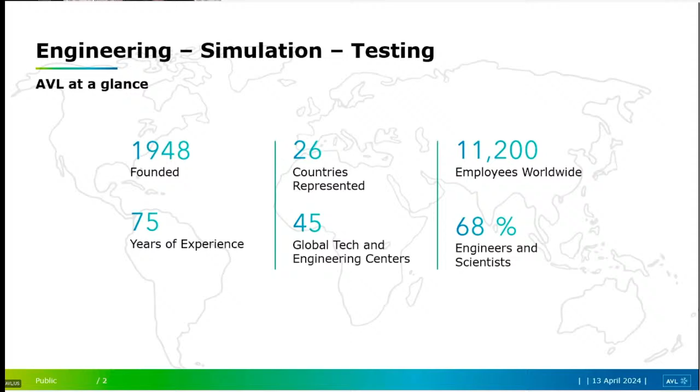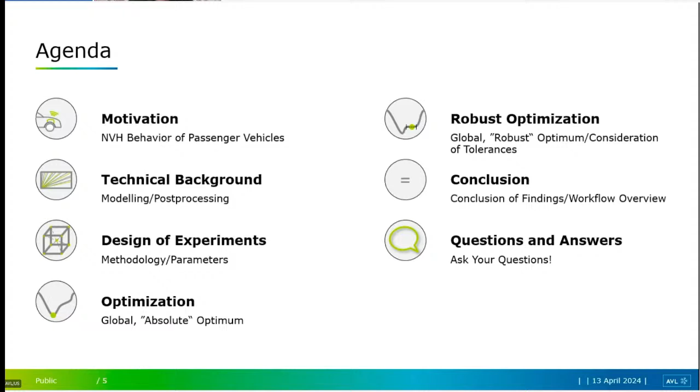With conventional ICEs, the engine is really masking a lot of noise from the gearbox. With EVs, the e-motor is actually very quiet, and nothing hides really annoying noises from the gearboxes anymore. So this gets annoying, and we want to prevent it. And also it's a cost topic.

In order to produce cheaper gearboxes that are still acceptable to the ear when you are driving at low speeds, the optimization of the gearbox is of much more importance than it used to be.

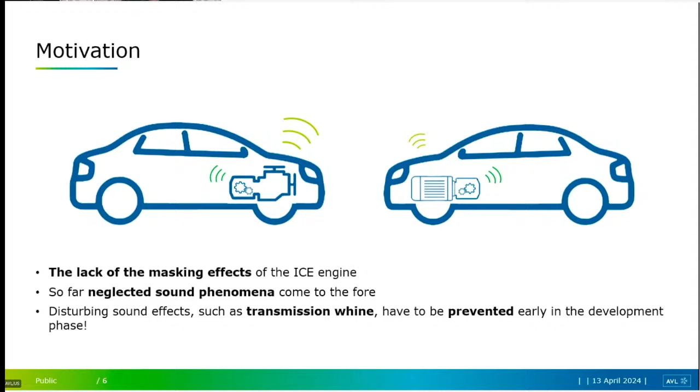If we move on, the gearbox that we will be looking at today, we have a screenshot here. In the middle, we see the e-motor that is connected to a planetary transmission, and then it goes in two gear stages all the way down to the differential, which brings the power to the wheels. And we see a section cut down here on the right side.

You see the bearings, the meshes, and the tapered roller bearings on the differential. Actually, these screenshots or images that you see here are from our tool AVL Excite, which is a multi-body simulation tool. Basically all the elements you see here are modeled in one 3D model, and it lets us simulate the interactions of the vibration of the entire part.

Now, the focus of the optimization today is specifically this second spur gear stage. We will see in more detail on the technical background on the next slide.

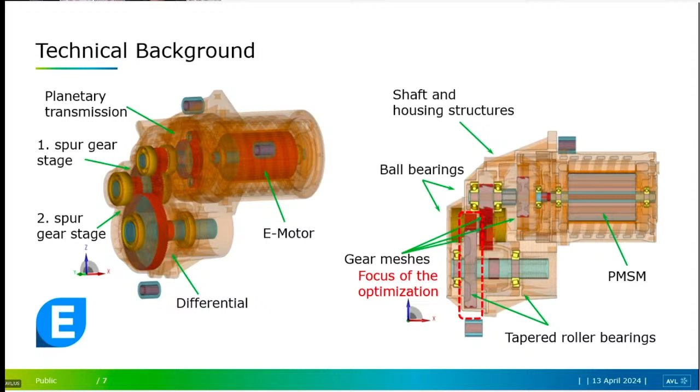So where does the noise really come from, or how is it introduced? When we look at this gear, it's the point of contact - basically by rotating and with the teeth, it introduces stiffness across the rotation. So this rolling contact of the flanks and the change of stiffness is introducing vibrations into the system.

These vibrations excite and transfer through the bearings and the shafts onto the case, to the surface of the case. We can follow this on the transfer path into the housing.

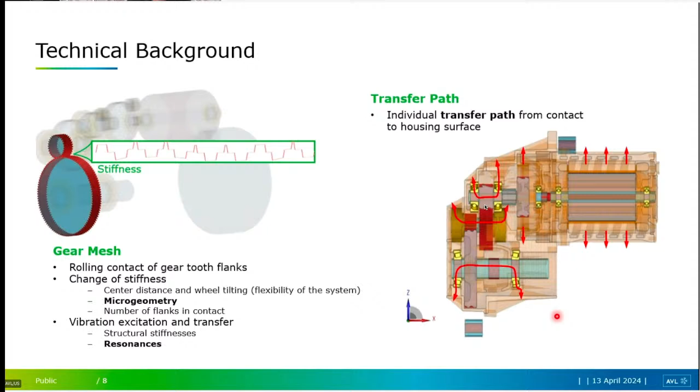Actually a nice technology in Excite lets you analyze this transfer path. So when we look here on the gear, we see the transfer path analysis, and specifically we can pick a point and see the connected elements and identify which connected parts contribute most to the actual vibrations.

By that, we can identify really what part is causing the majority chunk of the vibration. In this case, it was identified as the second spur gear stage, and we will look at specifically this one today.

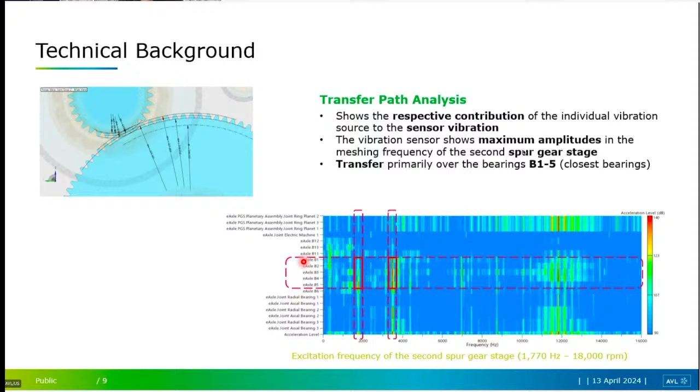It's worth mentioning that AVL Excite works on the time domain, so we can run fully transient ramp up over the entire RPM range over time.

What we can do then is draw a Campbell diagram on the full scale of the point. So on the right side we see the case, and we pick actually a sensor point on top of the housing.

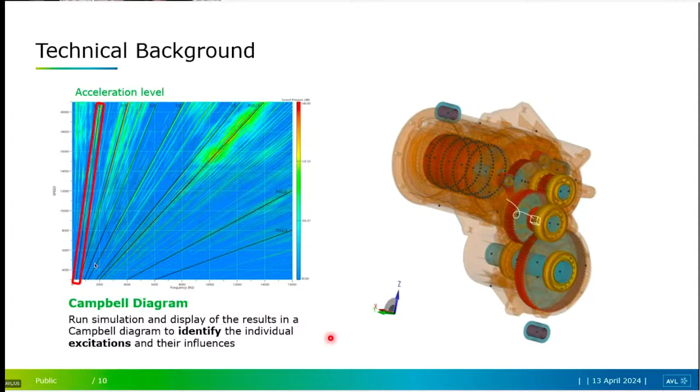Looking at this point, we can identify which one is the causing part or has most promising part for optimization. And this is what we look on the next slide.

Oh, yeah, so okay, I hand it over to you. With this one, basically, we need to know what we want to optimize and what we can optimize, and this is exactly where your specialty is coming into play.

Yeah, for sure. Thanks for the overview on gearbox design and engineering. So for optimization, you'll always need some parameters that you're varying and then some KPIs that you're looking at.

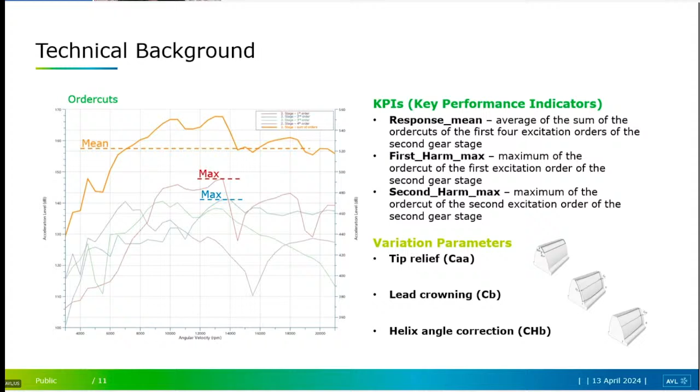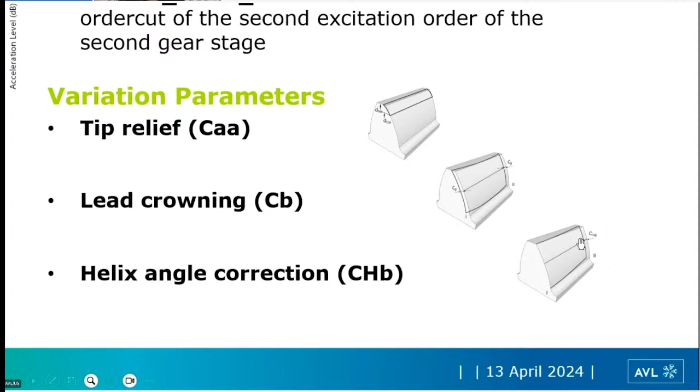And the things we're varying are the tip relief within the gear, the lead crowning in the gear, and the helix angle correction in the gear. These are drawings that show how that looks relative to the gear design. So we're doing the tip here, the lead crowning, which is this more width-based parameter, and then the helix angle correction, which is sort of a twist-based parameter here.

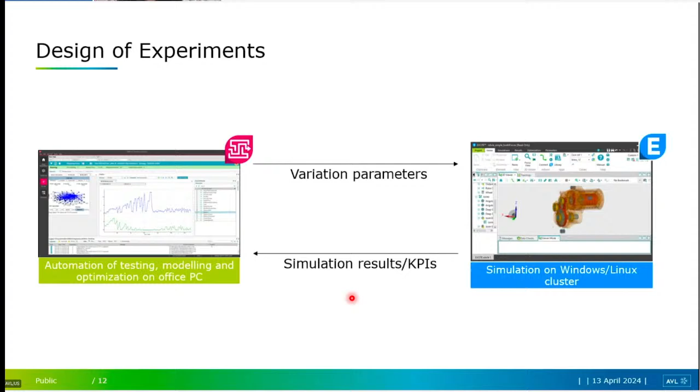This whole workflow can be run on Windows or Linux clusters because, as you all know, optimization is quite computationally intense, so that shouldn't be too much of an issue. Just for the calculation's sake, each simulation point we do takes about 10 to 15 minutes or so, and I'll explain why that's important later in this presentation.

So we're attempting to build out a design of experiments, which is the first step of any optimization workflow. These are the boundaries, the min and max, the range of variation of these inputs. Tip relief is 0 to 15 micrometers, same thing with the lead crowning. The helix angle is negative 15 to 15 micrometers relative to a certain point on the gear. And we also had to vary the speed from 3 to 21,000 RPM because we wanted to understand the sound output over the speed range.

Like I said earlier, our KPIs are the first and second harmonic of the gear meshing frequency — the maximum of that, and then the next one will be the sum. So it's basically 3 outputs and 4 inputs that we're varying.

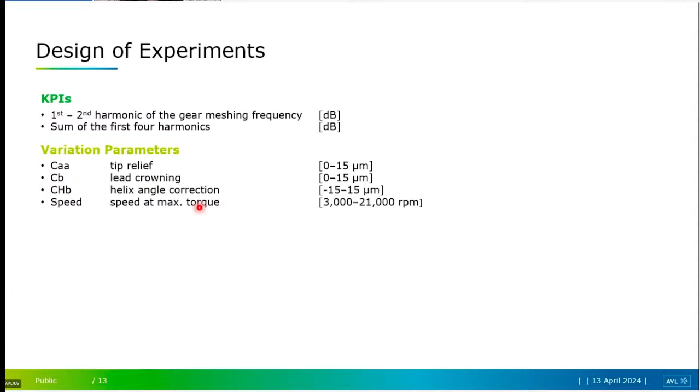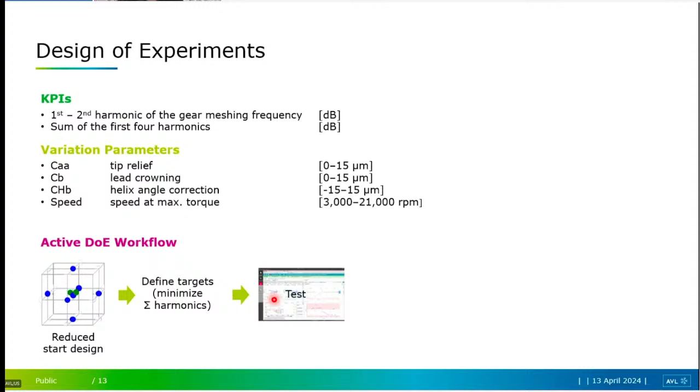In here, you see the workflow of the active DOE. We start with a reduced design just to understand the initial design space. We've defined that we're attempting to minimize these KPIs. During this simulation, or test as we'd call it, the results are sent to this active DOE, and what it's doing is developing a response surface off of these inputs that's guided by our target. It keeps telling it, hey, maybe you should fill more points here, maybe more there. So it's effectively a space filling algorithm with a bit of enhancement on AVL's own IP.

Then you'll look at your results and see if there's enough. There's an offline optimization that will occur here using sort of a hybrid of genetic algorithm and gradient-based methods.

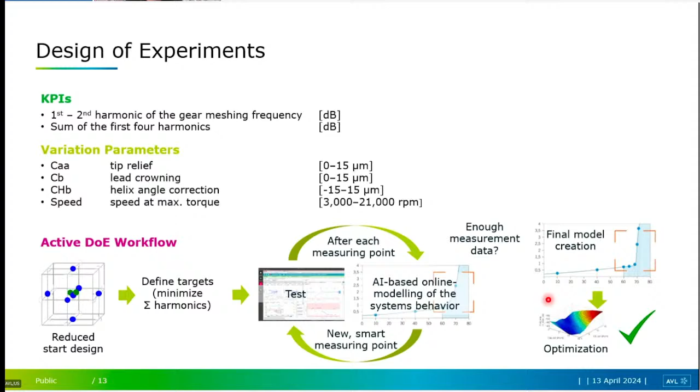When we go into the DOE, you can see here that we filled the space quite well. It's not a full factorial — as you can see, there are some gaps here. The reason is because a full factorial would take over 50,000 designs to be fully filled, and you can imagine at 10 to 15 minutes each, those 50,000 designs could take months to compute, depending on your computational resources. We did only 900 here, so you're only really looking at 900 points.

And those 900 points took us probably about the weekend to do — went from Friday roughly to Monday. That's the real power of having an intelligent space filling algorithm like the active DOE.

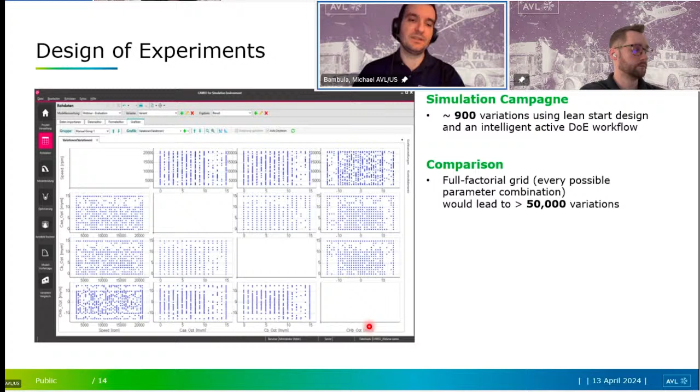In the design of experiments, after we've done all of that, what we're attempting to do is create a meta model or regression model of our DOE values. So we used a neural network to represent the simulations that we had, and attempted to make an accurate representation of our different KPIs.

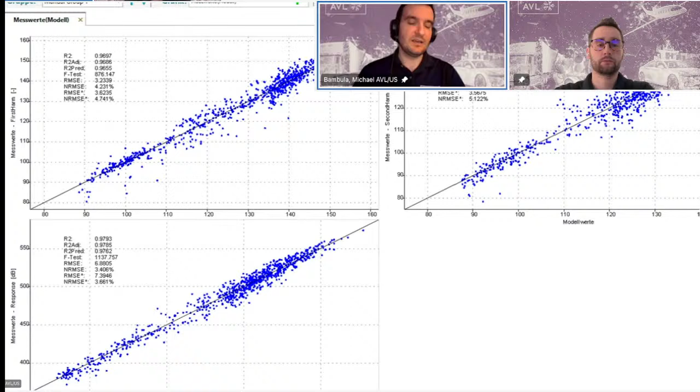You can see here we have the first harmonic on the top left plot, and on the top right we have the second harmonic, and on the bottom we have the sum of all the harmonics. What you can see is there's a relatively good correlation. We have different metrics, R squared, RMSE, and they're all relatively good. You're above 95-95 for all the R squared, so it reflects a relatively accurate surface of the DOE that we were doing.

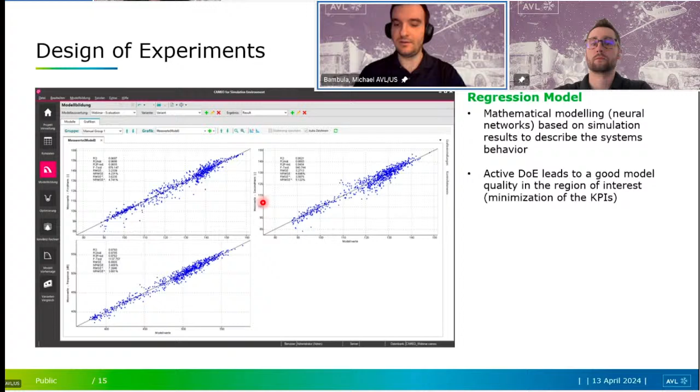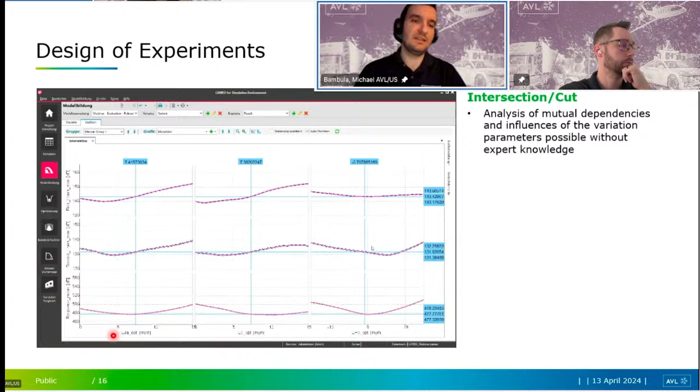And then the thing that we're doing here is we took a slice of that surface. This is what we call an intersection or cut of that surface. What we're doing is we're varying individually the inputs to understand the outputs.

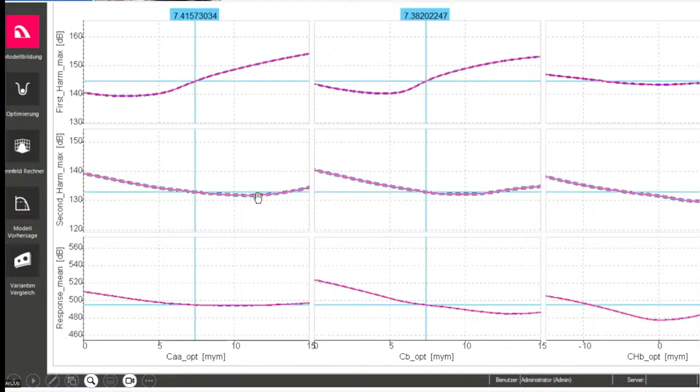So you see here we're varying the inputs, the CAA opt, CB opt, and CHB opt. These were those three inputs of the gear tooth that I was talking about. We're varying those individually to understand how the surface moves, because when you vary one, you move in 2 dimensions across the other surface. So you see when one of these lines moves in the horizontal, the other 2 red lines are moving up and down. This is just for you to explore and understand how that variation looks when you're doing this exploration.

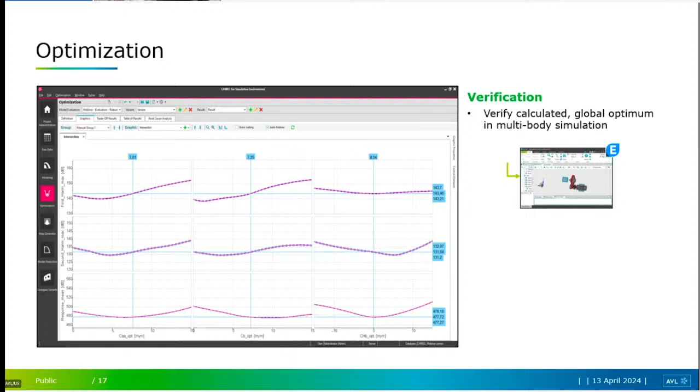But we used an optimization algorithm to effectively arrive at an optimum. And what we did after that, because it's a meta model output, you want to ensure that what you've arrived at using the meta model or the neural net that we were training on the surface, you want to actually validate that with a simulation or a real test to ensure that's exactly your real value. So this is where you see here on this picture, we verify it in Excite to ensure that's real.

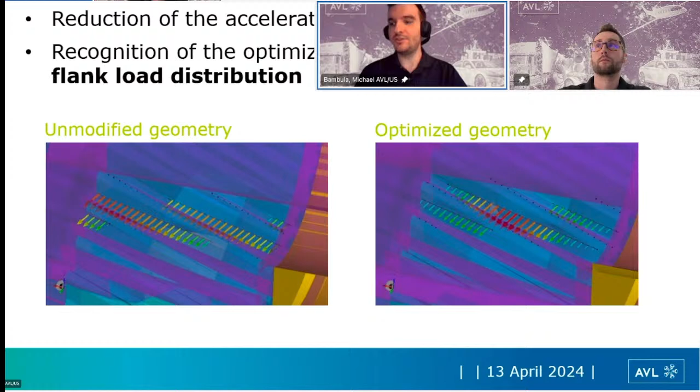However, there's a couple of questions we want to ask here, and we'll get to that in a bit. But this is how the geometry looks when you're looking at the unmodified geometry and the optimized geometry. You see your stress at the teeth is not very well distributed, whereas in the optimized geometry, you have it very well distributed. So you basically have a more durable gear set as well as a gear set that's quieter.

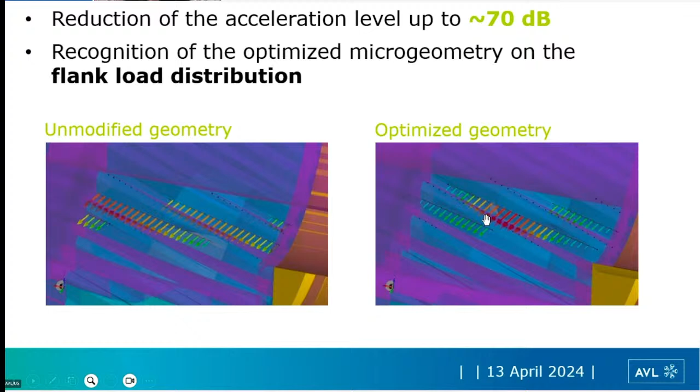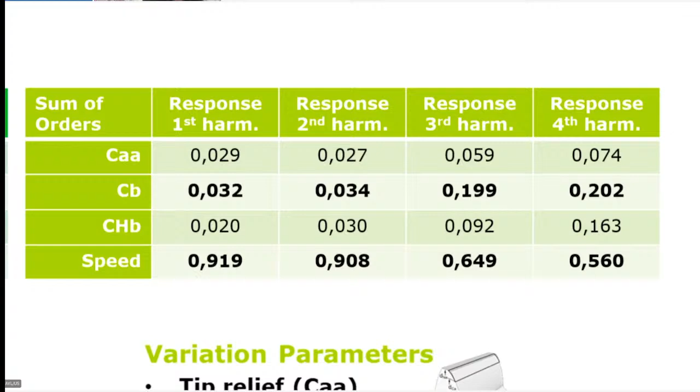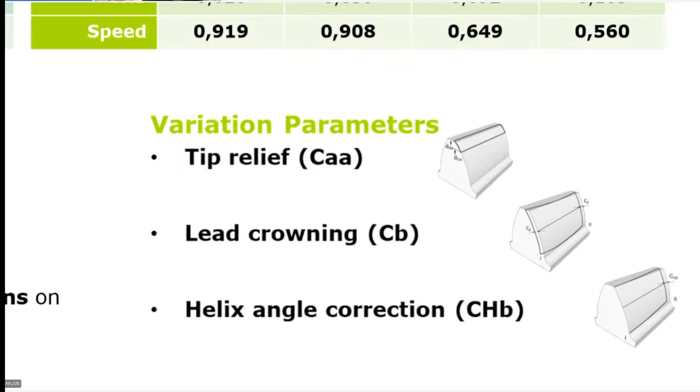And then in this portion of the presentation, this is a useful portion because what this shows you is the sensitivity of which of the input variables, the variation parameters that we were defining earlier, have a sensitivity to the output. So you could see here, in the sum of the orders, the CB, which was the lead crowning, is the most sensitive to your harmonic output. And then speed is as well very, very sensitive. As you're increasing or decreasing speed, there seems to be a change in your decibel, which is in fact intuitive.

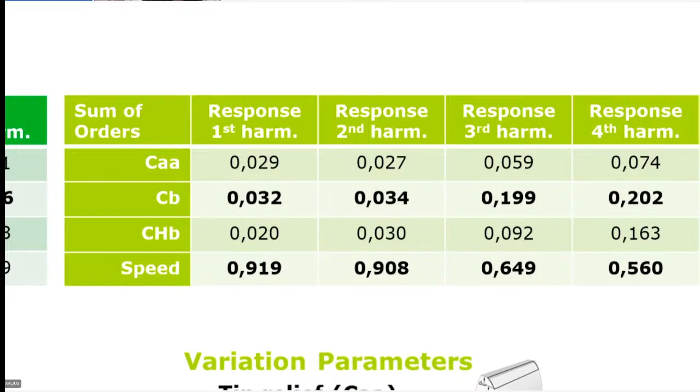So this helps you understand if you wanted to continue, you could probably reduce your input set because it's less important, it's less sensitive to your output. Something like this tip relief is probably not that sensitive to your harmonic output, so maybe you could reduce that and focus more on the other parameters.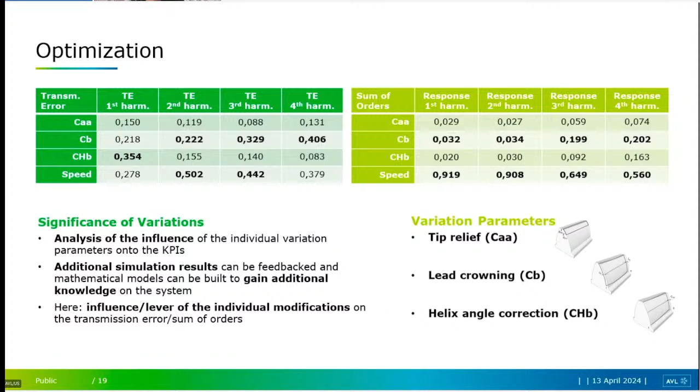So this is where the real question comes in, the whole robustness portion of this material.

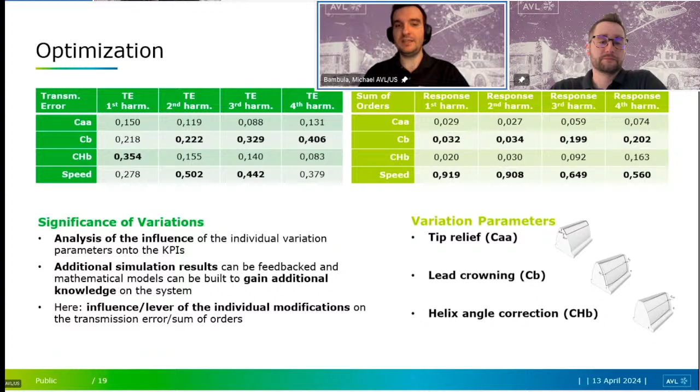I think now is really the exciting topic. So we did an optimization, and now comes the question of manufacturing variability. Whenever you do an optimization and you're only looking at the global optimum, it could be on a very steep hill, and if you deviate a little bit with your inputs, suddenly your performance drops off dramatically. It's not that you didn't find the optimum, you didn't find the most robust optimum. So that's where, in real life, you'd have to maintain really tight manufacturing tolerances. Any slight variation will make your system perform way worse than probably the second best optimum.

I'll show you guys a little bit about what I mean here. Some of these questions are: can it even be manufactured? So that's holding the tight tolerance, and how will the tolerances affect the decibel?

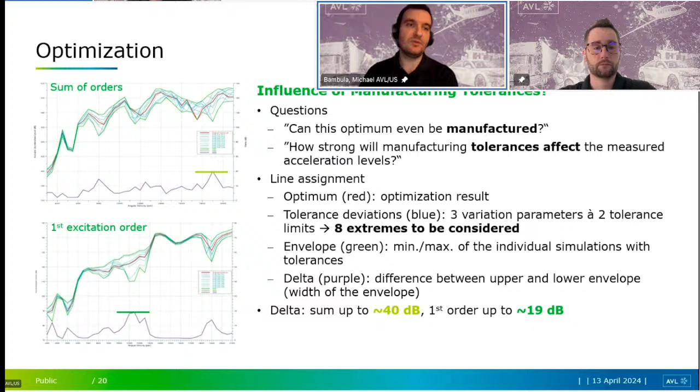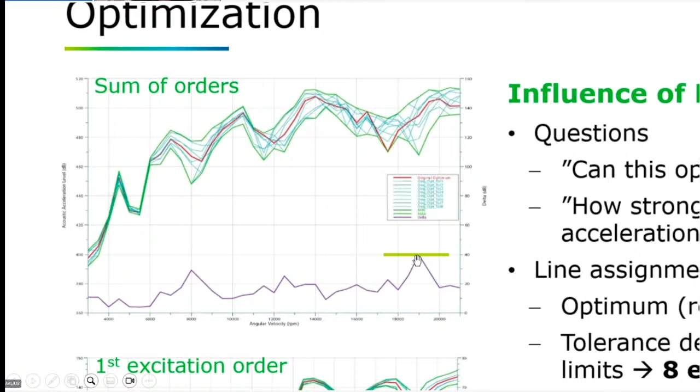You can see here we have a little plot showing the variation of the sum of orders. We did a quick tolerance study, and we show there's a band of min and max sum of the orders, and there's a delta between the two - large deltas. So you have very varying performance at the maximum here. The same thing goes for the first excitation - around 11,500 RPM, you'll have a huge variation in performance based off of your manufacturing tolerance.

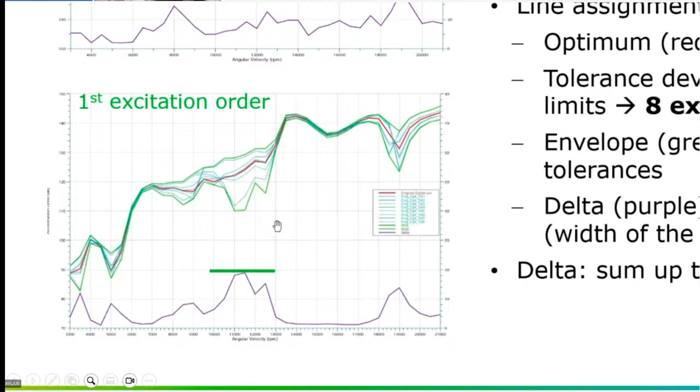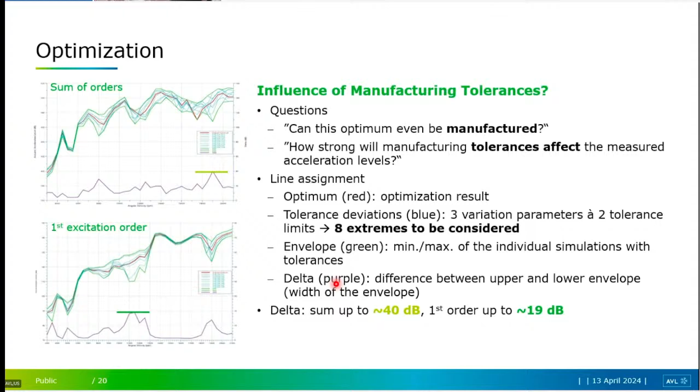This is something you want to take into account because you mitigate problems downstream. We'll show you guys what we did here for that. Effectively the delta of the sum is 40 decibels, and the delta of the min and max of the first order is 19 decibels - and we'll get that much lower.

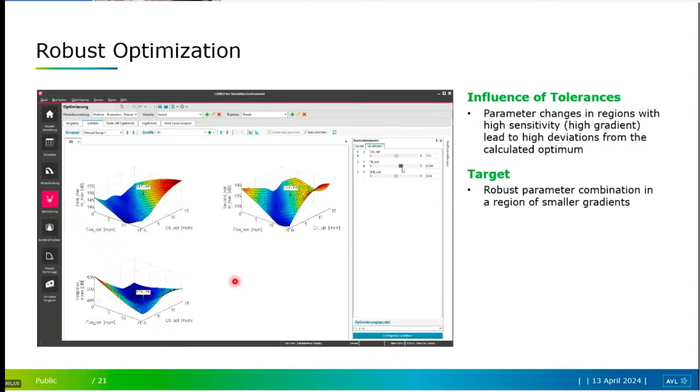We will eventually come to an optimum that we calculate here. So let me show you guys how that looks. There's an optimum that was defined here based on trying to balance the 3 goals. I'll allude to a problem here - you can see the problem on these two, on the first harmonic and second harmonic especially, that it's kind of on the side of a slope. So if we start varying anything, you'll get dramatic swings in that first harmonic and second harmonic output. It's important to consider that.

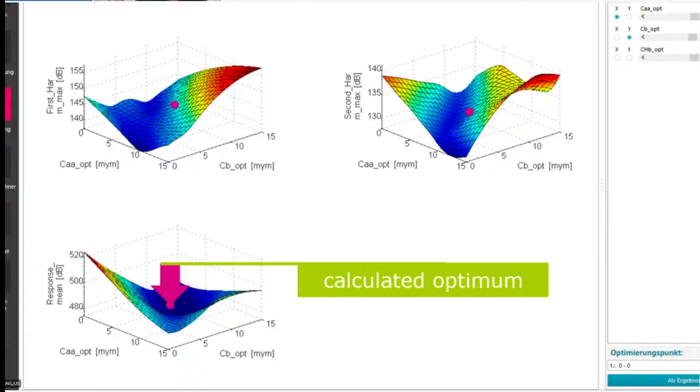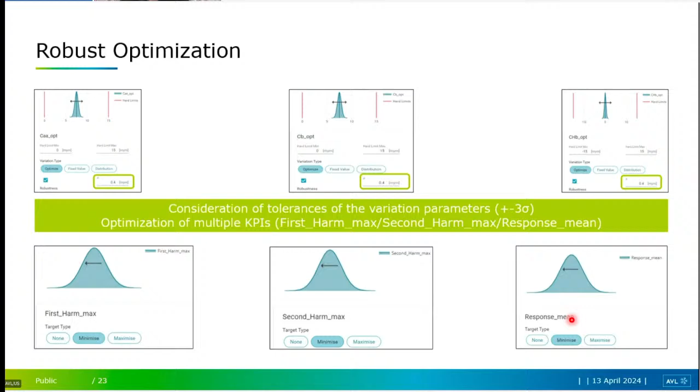I'll show you guys how we consider that right now, which we do with a robust optimization. With this robust optimization, we're attempting to consider the tolerances. The tolerances we determined were just doing a 3 sigma of the sort of optimum that we will look for. Effectively, every time it finds an optimum, it will then do this variation study, and we're attempting to minimize the distribution of the first harmonic max, second harmonic max, and the response mean. If there's a low variation in that output within our tolerance of the input, then we have what's considered a robust design. But if there's a large variation, that means it's not a robust design, because any slight deviation of your input suddenly creates a wildly different performing system. So this is how we went about doing our robust optimization.

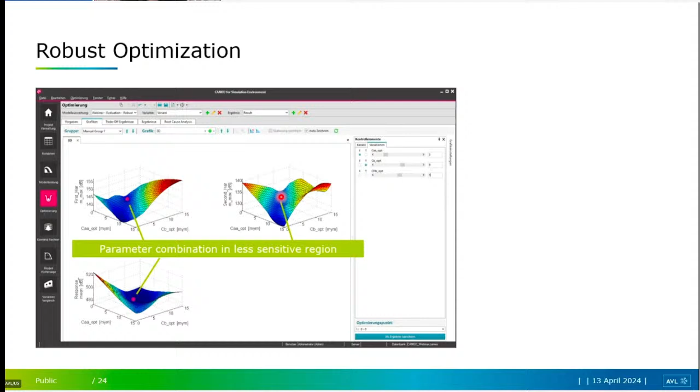This is actually the final output of the robust optimization. Remember, I mentioned we were on the side of this slope, on this blue area, for both the first harmonic and the second harmonic. Now we're not - we're in more of a flatter portion of this valley of the surface, and we didn't move very much compared to on the mean. So this was a more robust output.

You could see that pretty much visualized over here, where you're seeing the sensitivity analysis. We're in a relatively flat, greenish area here, and you could see that given this variation, there won't be a lot of deviation of this surface. Basically this is like the flat area, the green - so we stay within the green.

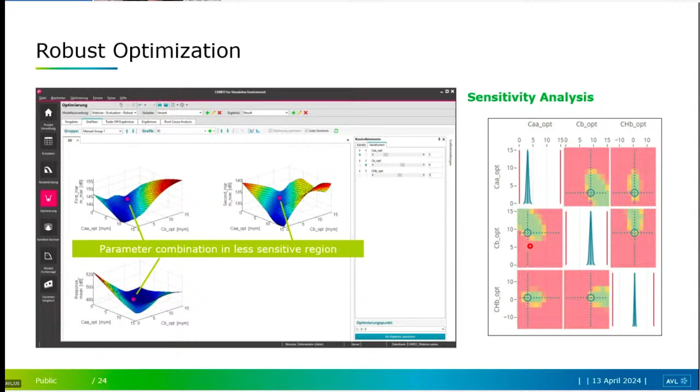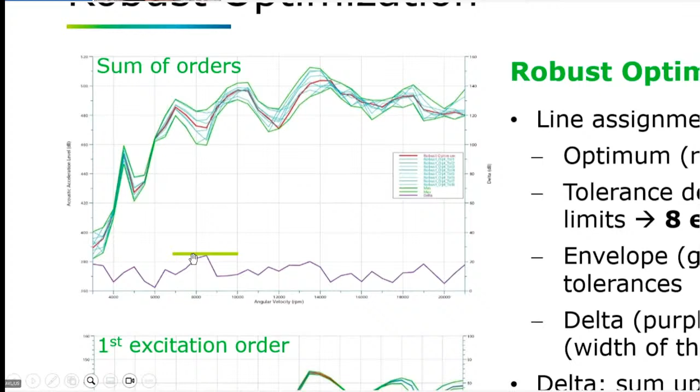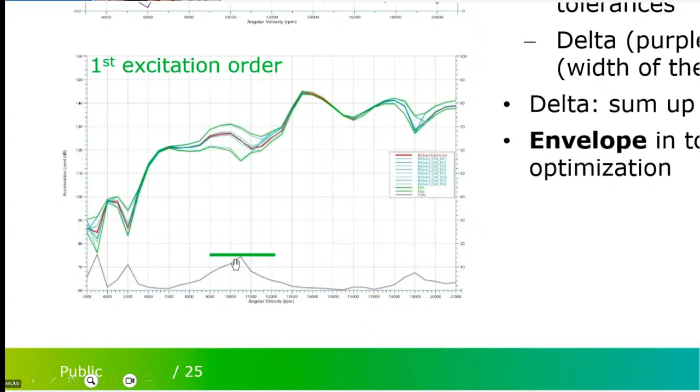You can see these outputs over here, where we did another plot showing the sum of the orders and the min and max. You can see here that the delta is a lot lower and a lot more consistent. It's especially low for many portions of the first excitation, and probably a lot flatter on average overall than it was before.

You can see we have a 24 decibel width of the min and max when we do that variation. So the smaller that value, the more consistently your system will behave, and you don't worry about unanticipated noise. Same thing on the first harmonic—it's 14 decibel as the max, which means it's a lot more consistent performing.

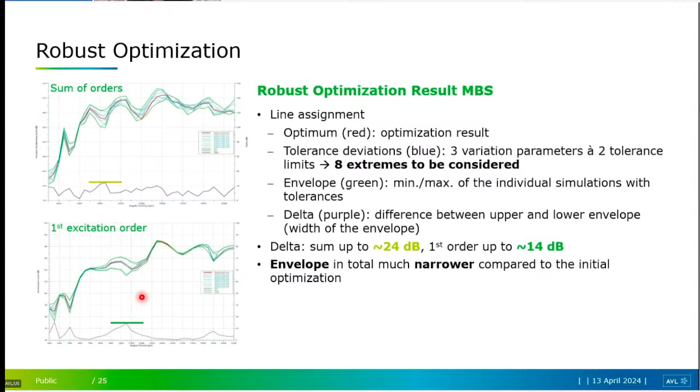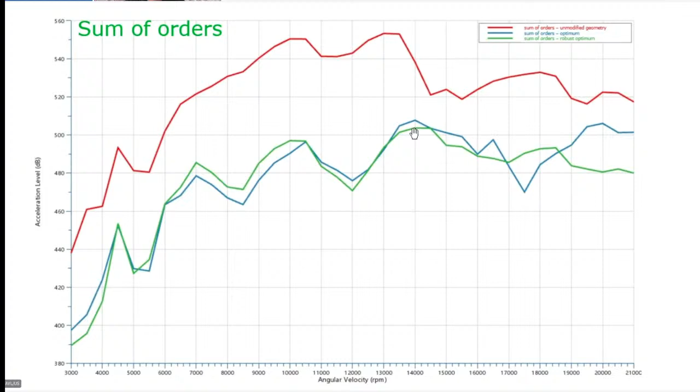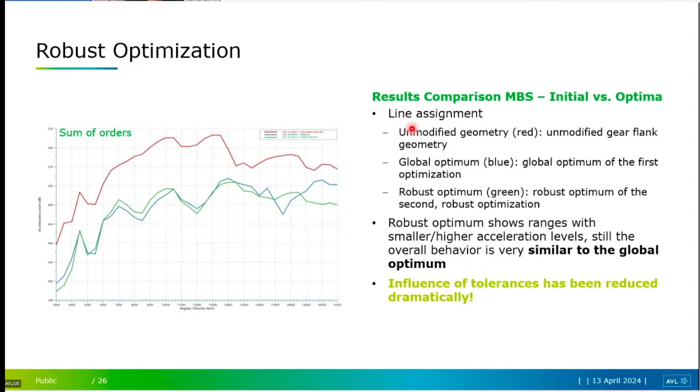You have a risk that when you send that out and manufacture it at mass scale, you'll have two systems that behave quite differently. So effectively, to summarize the workflow: we defined our variables, we defined relevant KPIs, we set up our optimization, and we performed model-based simulations. Then we did the meta modeling of the surface and the optimization of that surface, and then we verify it—sending that optimum value back into the simulation tool to make sure your neural net and your simulation show the same value.

And these are the benefits of it—you can do that for any system. We have workflows for batteries, we have workflows for fuel cells. You save a lot of time and money, and you're able to quantify the influence of the tolerance you're setting. That's one of the most important things, because in industry we hear a lot that people mostly work off of nominal geometry, and when it goes to production, it's never nominal. So that's something we take into account for a more robust system.

Ideally, you want every vehicle to be exactly the same in the end—that's what you strive for. We can do the same for the e-motor, and probably battery as well, but specifically the noise of the e-motor is also a very similar topic. You don't want, as an OEM, for your vehicle to be like 'I bought the Q1 2022 model and the Q3 2022 model is the worst' because they had a tolerance drift at the factory—that's not a reputation you want. So this is where you have consistency across your product, and that makes for a much better product.